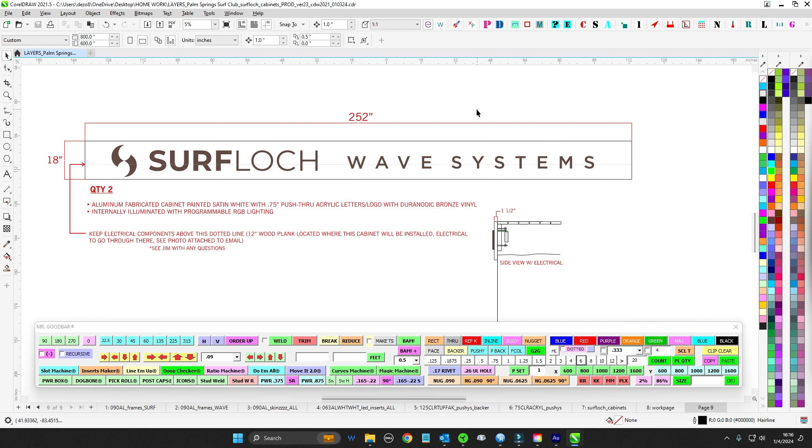Right, time for another one here. So we cranked out the Surfloch Wave Systems for next door, Palm Springs Surf Club. So these are going to be two big old long boys, one on each side of the pool.

So you got quantity 2 of this whole thing. And as you can see, it's 252, which I think is encroaching on your main verticals for the date festival sign. So it's pretty big.

So upon seeing how big this is, I talked to Jim, and he agreed that we would want to probably break them apart into 2 separate cabinets. And then install is just going to do a bonk when they go to install it and try to make it look like one big sign.

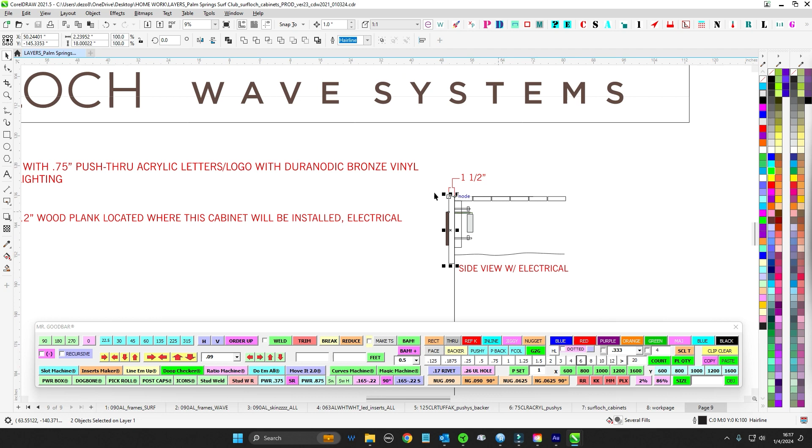But essentially what we have here is just a 1.5 inch wide illuminated blade sign that's super long. So we got issues with clearance. We've got trying to stuff all this stuff into that skinny thing.

Also, it's getting installed on the side of the pool, so unless you have a boat, you're not going to be able to access the front. You can't access the bottom. You can only access it from the top, removable top here. And then once it's installed, they can come in around the back here.

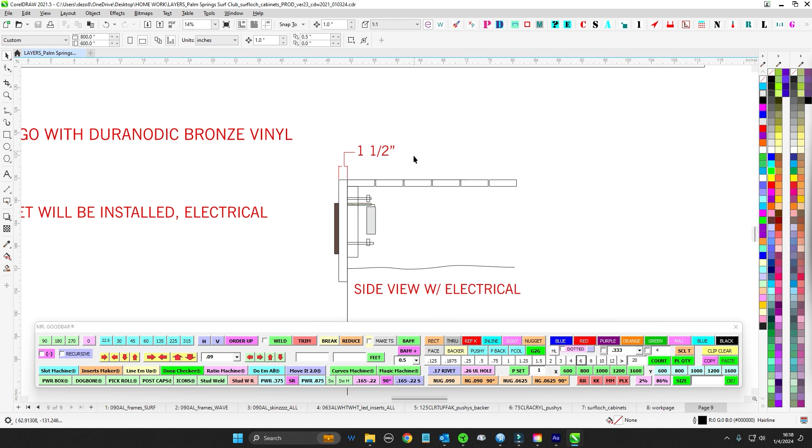But essentially, we're going to turn this into one big old stud-mounted, illuminated, flat cutout letter that just gets mounted directly with studs. So super challenging. That's the whole reason why. Otherwise, I wouldn't even make a video. It'd be pretty simple for you guys.

But there's a few things I want to point out and make sure that you don't get caught out on anything. So just going to go over that real quick. So with that, let's get after it.

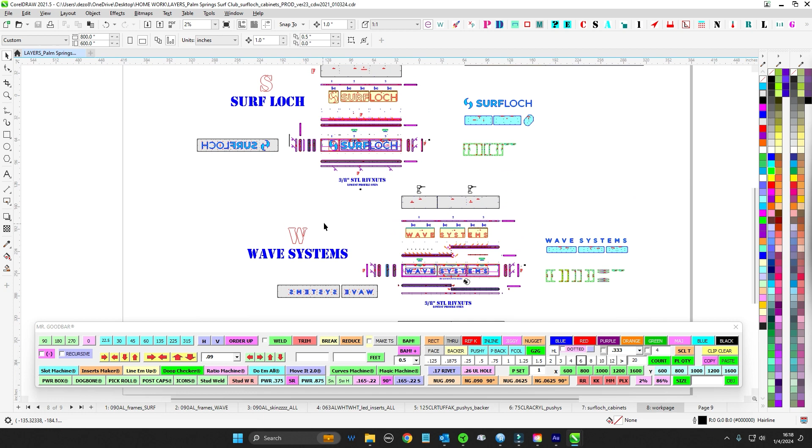So lay of the land, I broke it up with the surf. You got the frame parts here, and you do have your skin strips on the side and the top. So look out, or on the bottom, look out for those. And then I got the wave cabinet.

It is longer than the 10 feet, so it's going to be seamed. So pain in the butt. So you're going to have these seam jigs over here.

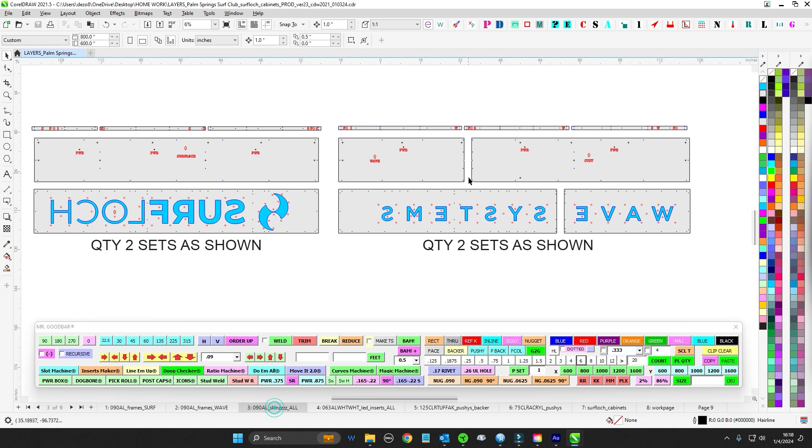Look out for those. You got your skins, back removable, top removables, and you got your faces, shoot studs, all that. 063 whites. You got bend marks and all that. You got the bend scribes and everything.

So you got your 1/8 clear Tuffak. Get that to first shop like we do. And 3/4 inch pushies, get those to first shop. They need some stuff on the face. Got a couple of patterns there for first shop.

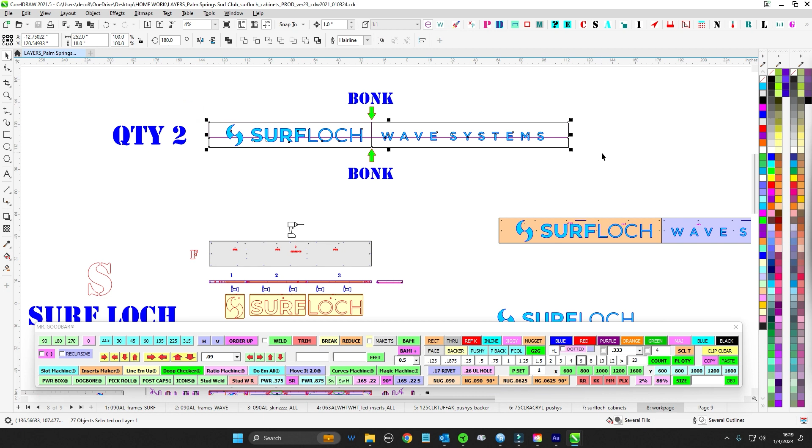So here we go. Like I said, you've got technically quantity 2 signs that are going to get bonked together on install, but it means that you have a quantity 4 total. You get 2 Surflochs, and then you got 2 wave system cabinets. And you don't have to worry about joining or anything, they just get sent out separately.

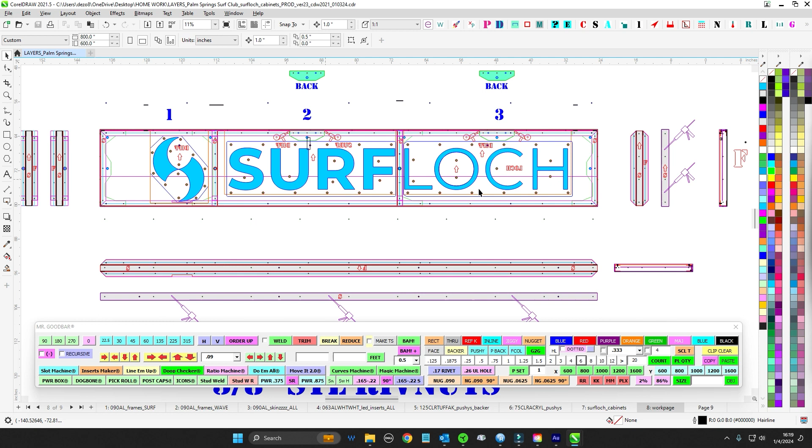So anyway, I just want to point out, it's going to be basically a blade sign 1.5 inch with 1.25 inch leg C-channel system. It's only going to have, because there's so much, all of this takes this all up, we only have 2 support struts in the middle. And so that means we only have the 2 jigs.

And then we are going to do 3/8 studs. I wanted to go a little bigger than 5/16, so dig out the crimper for that. And because you're going to find out that there's no room in this thing, make sure you grab the 3/8 steels that are the thinner ones to make sure that we keep the lowest profile.

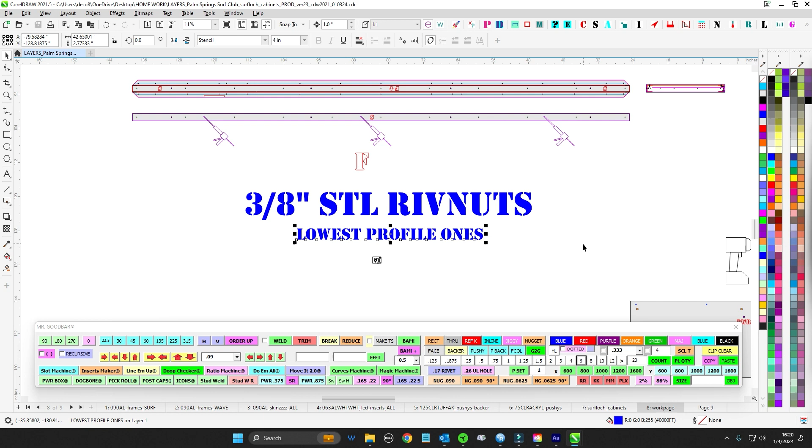Because even the squish in the back could be interfering with our LED trays once we get there, so just make sure everything's on a diet. Don't try it, just make sure everything's all thin to win. So I do have face, because things are asymmetrical, keep your faces facing forward because holes and stuff need to go front to back justified.

Same thing here, I've got the stud clearances on the back side. Obviously no studs to the front. So all the studs you see here - I've got a symmetrical row of studs along the total top.

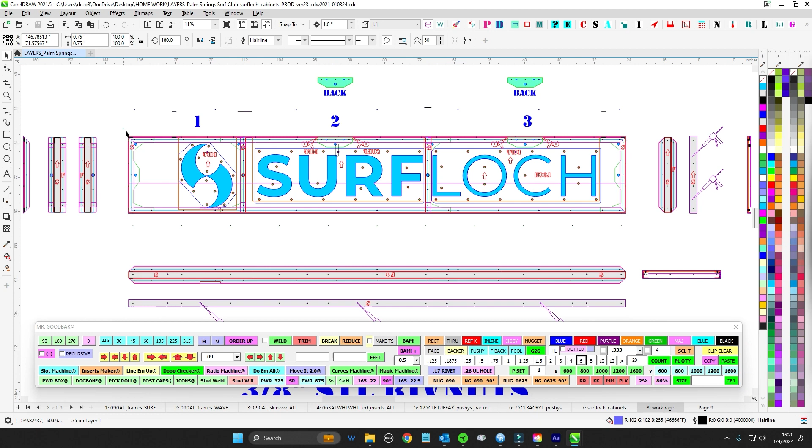If we go to the skins, it's kind of easier to see. We've got all the studs going out the back on this side, then one here, and then one on each of the braces. The bottom only has basically 4, just to help suck it in.

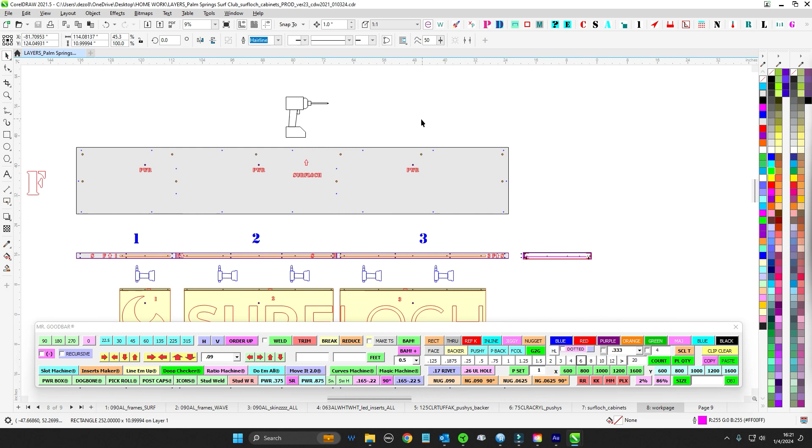Now you see this line here - everything below this line has no access. So everything like electrical and mounting needs to be above this line, because there's a wood plank for access. That's why everything seems kind of top heavy - everything's mounted up here, and everything else just drops lower.

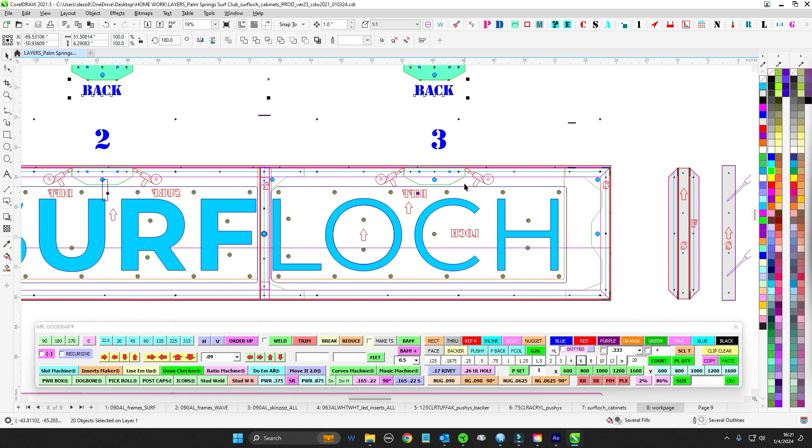So there isn't really anything that we can do to pull it against. And also, because I wanted those extra studs out the back there, these 2 jiggies really don't do anything for framing. It's just to hold a stud, and they're justified to the back side, so obviously you don't need anything in the front. These are just basically stud holders, riv nut holders. Get those in place and tack them in really well because they're going to do some work.

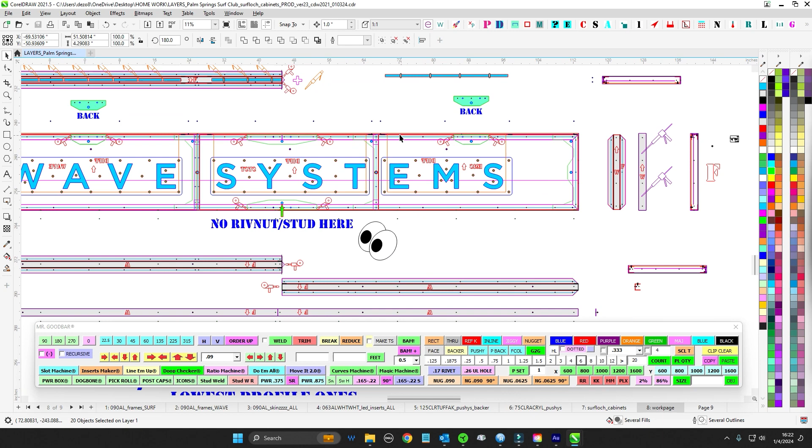Along with these guys who are internal to jigs, like we like to do. Make sure same thing with wave systems, you'll have those two on here. And then I also stretched one specific for wave systems that will be your jiggy seam sealer upper there, your tie-together jig. So watch out for that with the wave systems.

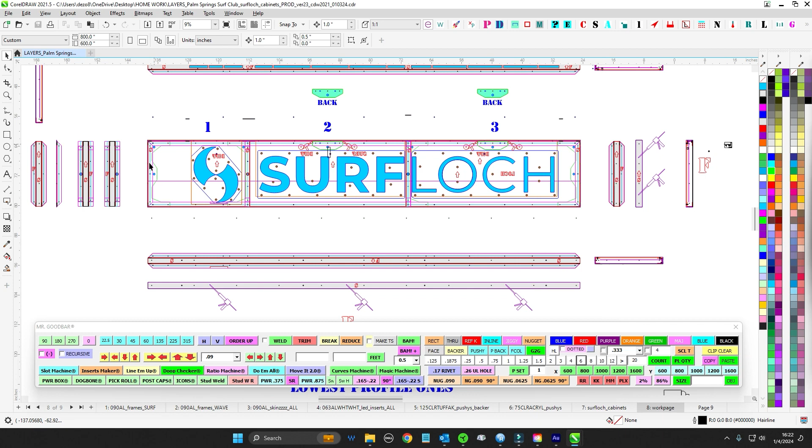But anyway, once you get all that done, you can go ahead and put your face on first, I guess. And then we're going to do that trick we've done before where you add a hard candy shell to the sides and the bottom. What that's going to do is give you a pocket out the back. You can see here, I'll just make this light purple here - that'll fill up all the side, and then you'll have your face here.

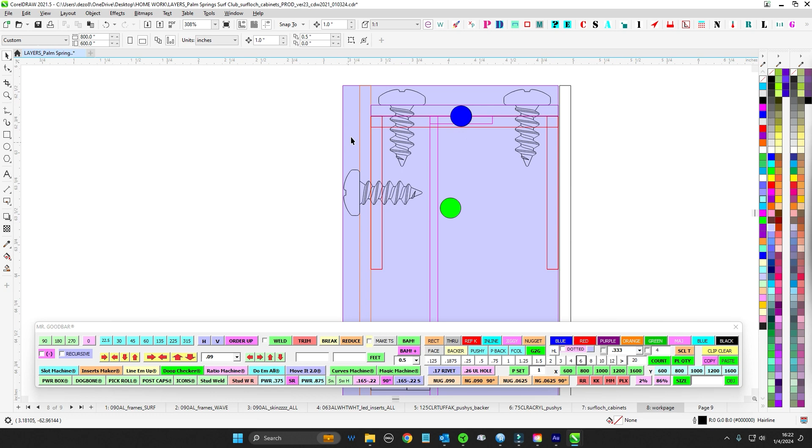And what that does is give us this pocket in order to hide the screws out the back, and then this will be the back skin right here. So the orange will be your back skin - we've done this before. And that will also create a pocket up top, nice and deep.

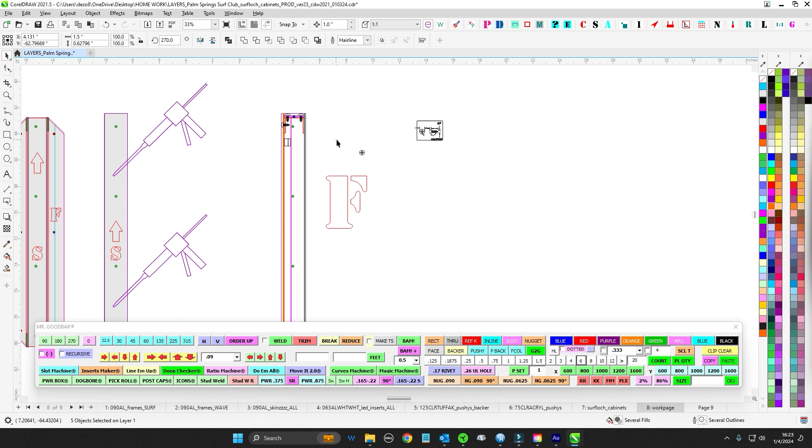And then I recessed the top skins way down, so that way the screws will hide down there. So when you're looking at it from the front, you can't see up here. And it creates a nice cavity in the back to hide all these screws.

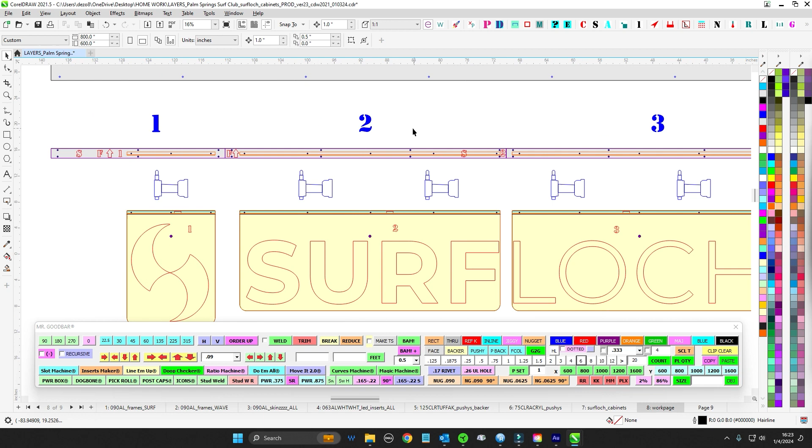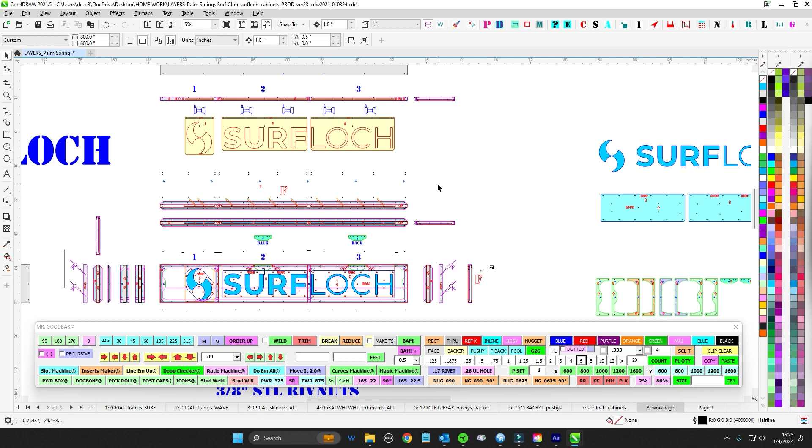That means at that point this is going to be a toaster strudel Pop-Tart system, where if you ever do need to get back into this thing - this is going to basically be like an iPhone. It's not really meant to be serviced once we get this thing on the wall.

Then technically we can kind of pull these out if we have to. Might be a pain in the butt. Make sure there's plenty of lead off of this to be able to poke out the back, so that way they can service it. But each lead will get its own puncture through, because there's no way for you to get your hand in this little slot.

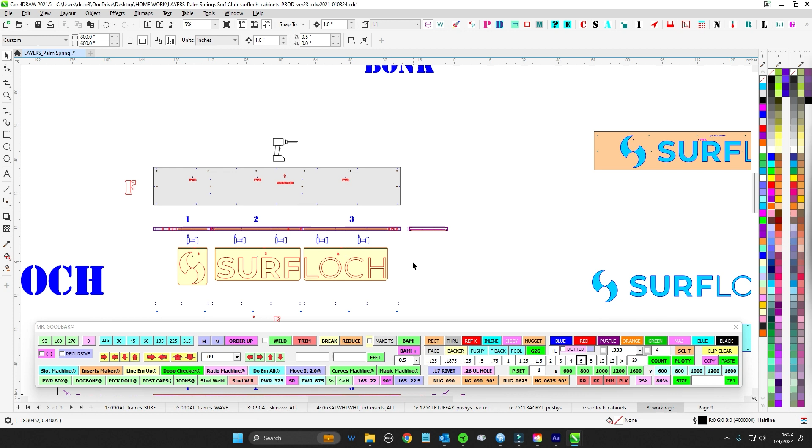So essentially it's just do your best to run wire through, and then install will deal with all that on the back side. Again, it's going to be just studs out the back, wires out the back, and then they're just going to push this onto the wall once they drill their holes. So like I said, you're just going to rivet that to that.

And then in order to open it up, I think you can see these guys, you just go ahead and slice them up, and I think I have enough room. Now you can see, let's go to a side view here.

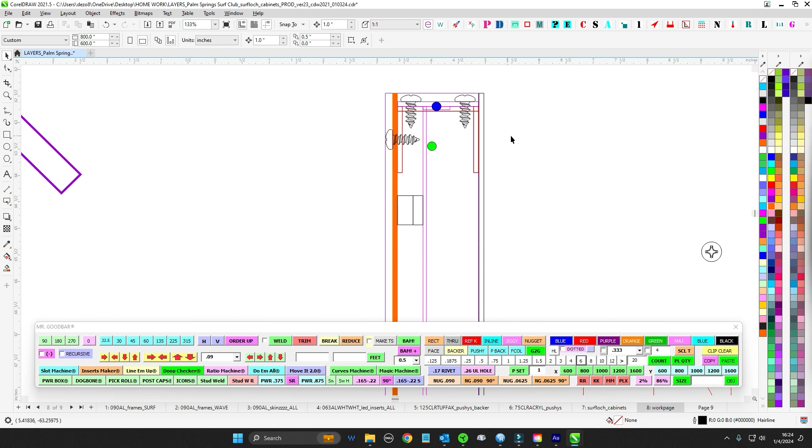So the magenta here, you know who you are. The magenta is going to be that 063 white. So you can see where we're going to have less than an inch off of this from the face. And then you've got the LEDs themselves. So these guys are going to be right up against the acrylic, and then you're going to have just enough room to slide them up in and out if you have to.

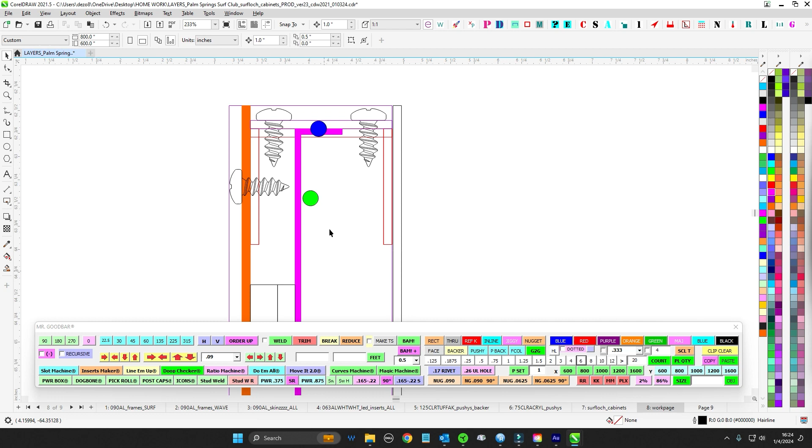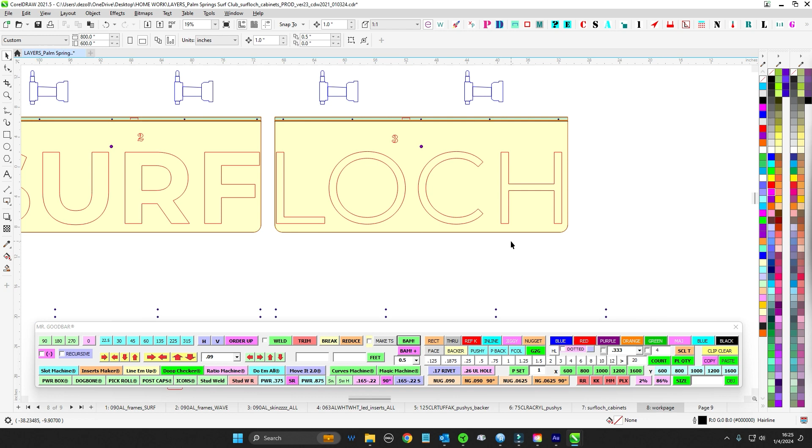That being said, normally what I do for you guys just to save route time is I'll just make a rectangle for this and you just fill the rectangle. But because this might have to have accuracy, and putting LEDs in between here that far apart is going to be a waste of time, I'm thinking you might just have to put the LEDs right behind the letter to get the maximum amount of light. Hopefully no hot spots - thankfully it's pushed through. But you might just need to have that accuracy.

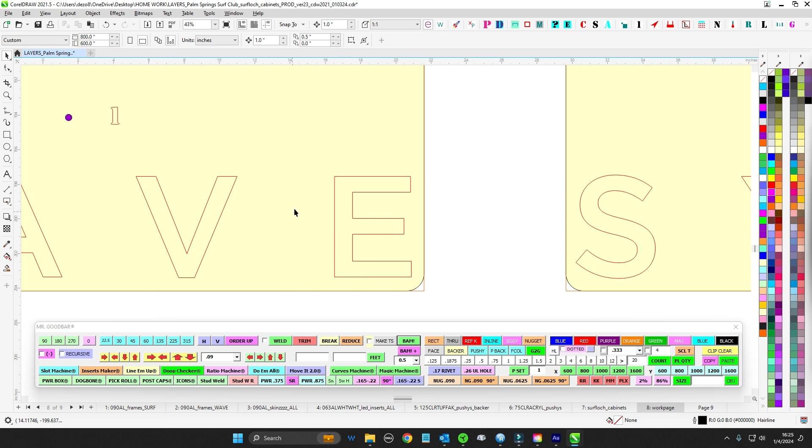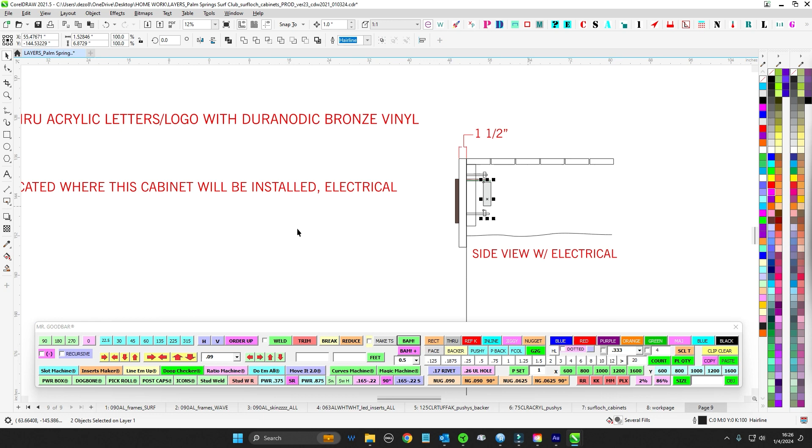So you might just be putting LEDs there and then jumping just to get maximum action. These are going to be RGB. They're going to be, I guess, just use the same that you used for the cactus. And then they're going to provide their own electronics back here, I guess, to get their disco on. But you can see right here, it'll be internally illuminated with the programmable RGB.

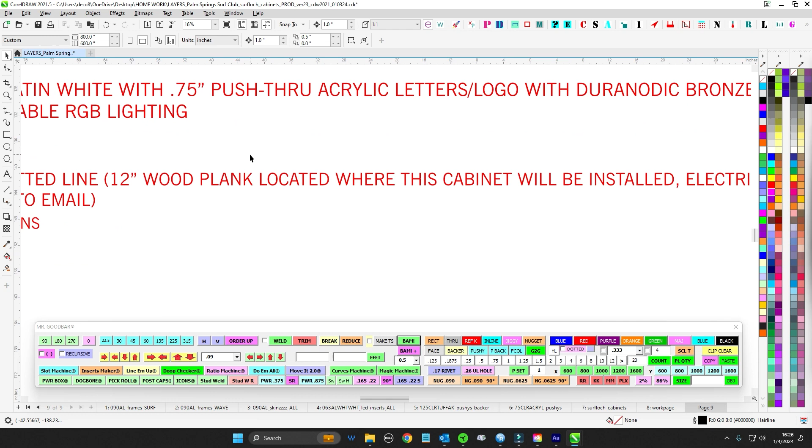So you're going to need more of your RGB wire. And I imagine those are 12 volt, I think, right? So I imagine you'll just use a fast pack back here. But I'm not sure what else they're going to need for their DMX controller. They might need to be - you might actually have to send over another box, or something might happen. So I would stay on alert for that.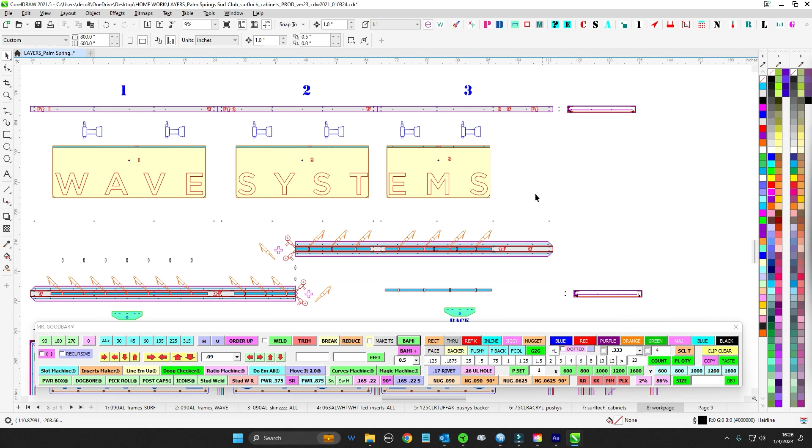Do your cactus LEDs, and then be ready for maybe a little raceway or something for their controller. And then I imagine, like I said, you probably just send over a fast pack or a double banger fast pack for the 12 volt. So just be ready to send something to me, or get something going if they hit you up.

So, yeah, you're just going to chop that out like we do. And then that's going to create the toaster slots for these to slide down. And then that's pretty much it. So it's going to be living, like I said, almost like an illuminated flat cutout letter. So Wave Systems is the same, except it's seamed.

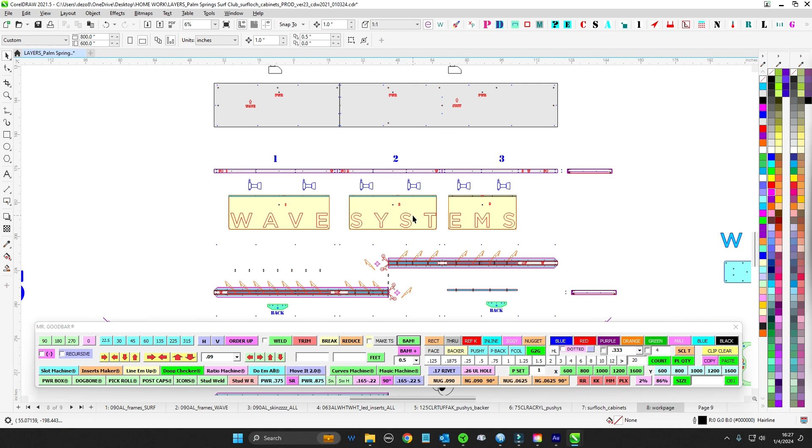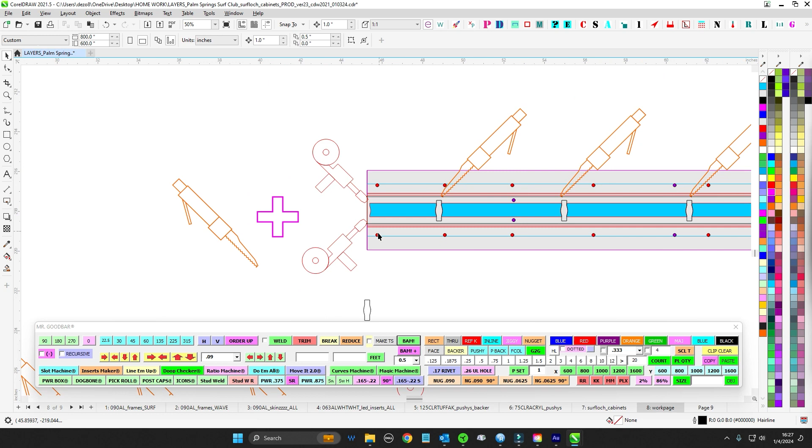Now, I usually don't like to put the seam of a cabinet where the opening is because it just adds to that weakness, but it should be fine. So when you use the splice jig, weld it up really well. And I'm giving you on both of these just a single bend tab in order to fillet weld against that really well. There's no room to do a rivet like I usually do. So this will be a hot seam, not a cold seam with rivets.

Bend this little tab up, use it to do a nice fillet weld, and then just chop it out. Chop all this out, but try to keep that strength right there as much as you can. You're just going to chop that open and then chop all these open, just the slots that you need right there. So that'll be that toaster strudel.

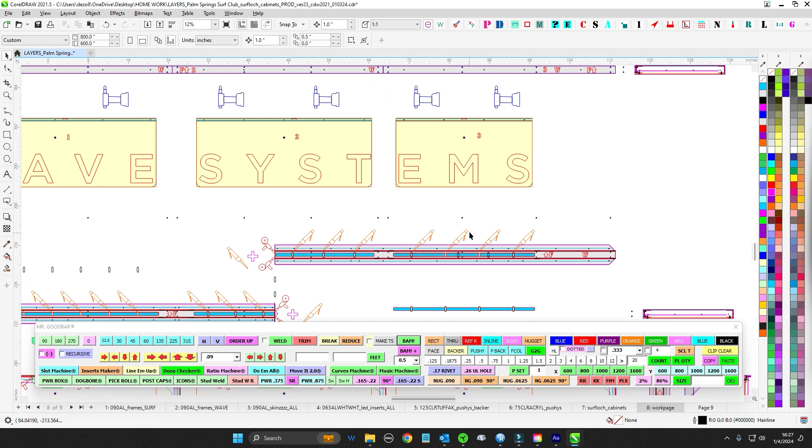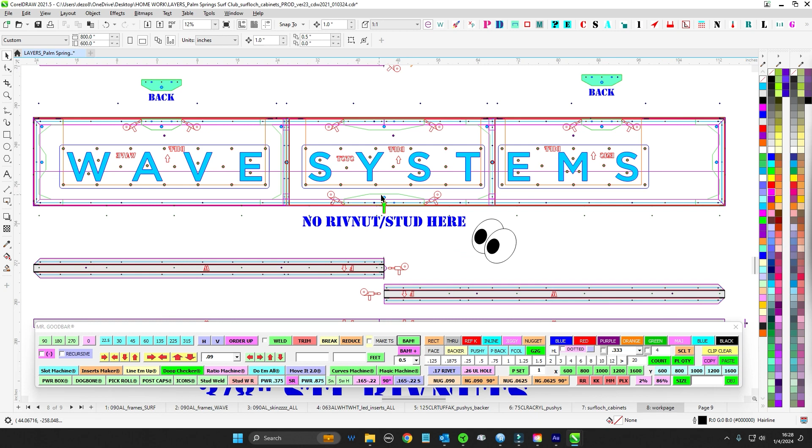You've got the same back on those, same back on this. You will have one on the front, but obviously don't put a riv nut on the front. Same thing here, you don't need any riv nut studs on the bottom at all, front or back, because it's below the mount system line, this magic line right here. So keep everything the same. That way you didn't have to worry about it.

It's gonna be the same deal here. Lord your little hard candy shell all the way around. You've got removable backer, good to go. Push throughs will allow you to do push throughs and then put the backer on, and then you're gonna seal it up. Like I say, talk to install, give them plenty of leash out, because they're gonna have to do work back there somehow.

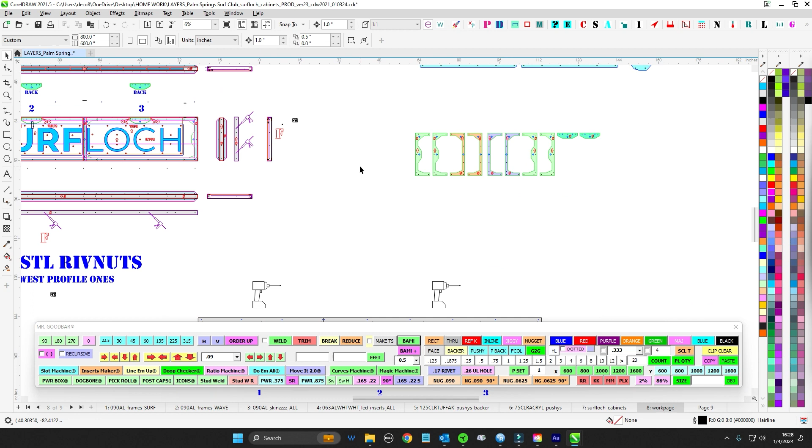As far as studs are concerned, this brought up the whole thing. So let's say that this is the squish for your 3/8, and if you have a stud going in here, it's going to be again right up against the back of the 063 white. So you really don't have much room to work.

I would say if install's cool with it, what I would do - again, it's not serviceable though - but I would just go ahead and lords the stud in. So you know, do your riv nuts and everything. And when it comes time to assemble this thing, go ahead and put a little lords on the stud, screw it in just enough and let it cure. That should be good for that, that's fine.

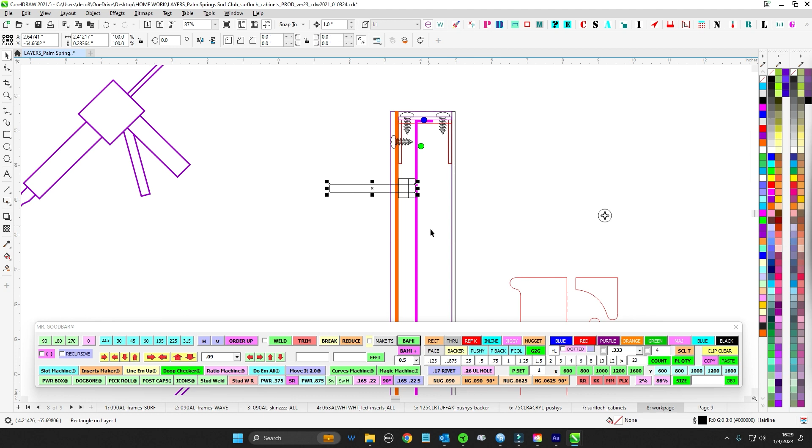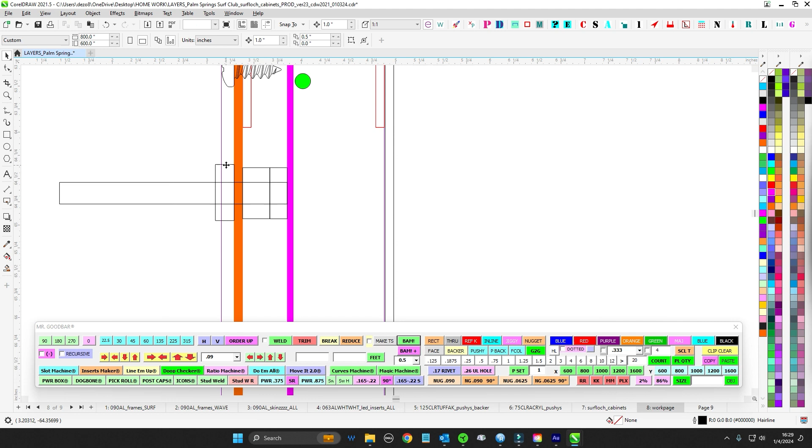I'm also going to bring in some thinner jam nuts. These are meant to be up against another nut, but they're low profile. But they're still almost a quarter, so they would fit in this back pocket, but what I saw was they would poke out just a little bit. I don't know if that would be okay, but that would allow you to jam this against the other side, so it would be like right here. But again, you would have to make sure you have just enough stud out and have that jam nut work, because any amount of stud sticking out will start to interfere with your toaster slot, and that's not good.

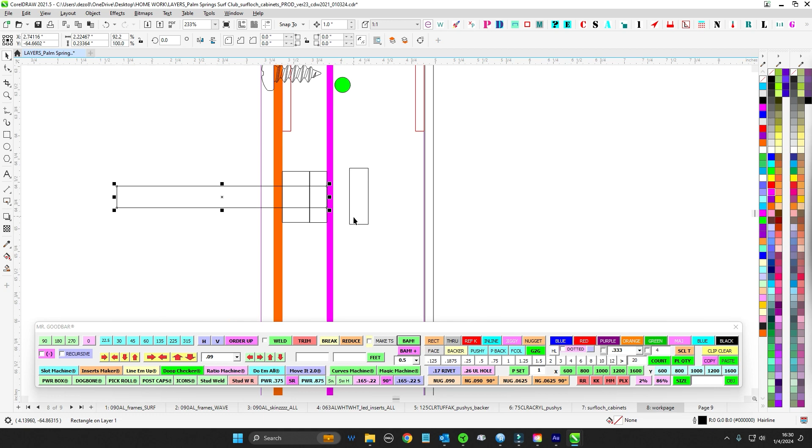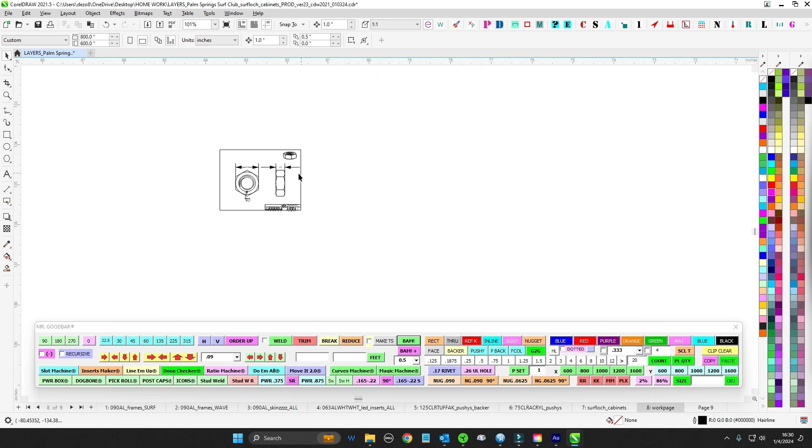That would probably be that. But I will have those thin jam nuts for you coming in, just in case there's something you can make work for that. But otherwise, a full-size nut is not going to fit in here. So anyway, that's it for that. I think that's it, just all that, these things, rivet, cut.

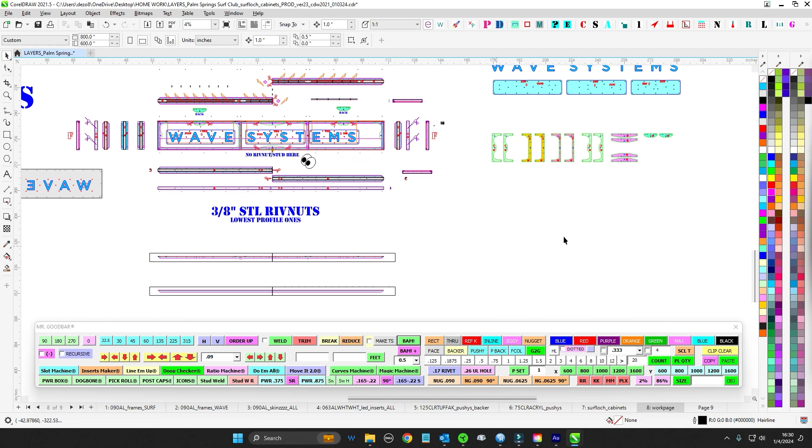Little quickie here in between all the other stuff you're doing, and I will then start in on Indio. So Indio is going to be coming up on step, so be ready. Just everything with an S is Surfloch, everything with a W down here is Wave Systems, so just keep that in mind, so you kind of know what's up.